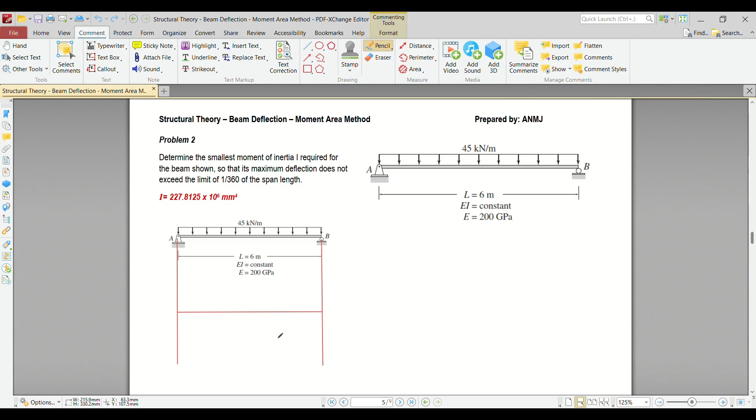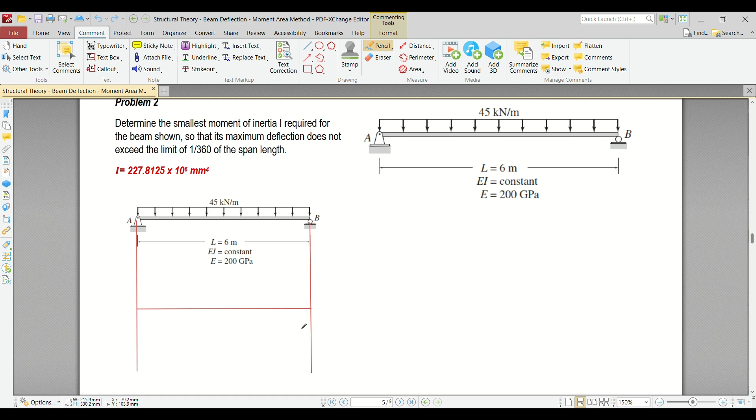Okay, let's try to solve problem number 2. It says to determine the smallest moment of inertia I required for the beam shown so that its maximum deflection does not exceed 1 over 360 of the span length. So what we're looking for here, class, is that our Ymax

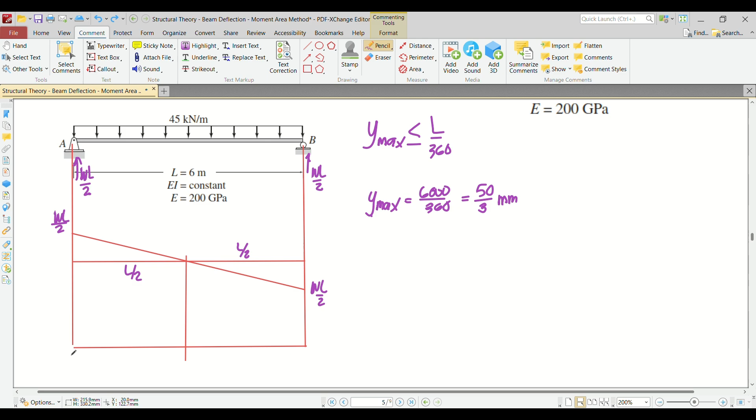So, like this, class. Now, how do we get the value of the height of this moment diagram? It's just the area of this. So how? 1/2, since that's a triangle. Let me put this here. 1/2 times WL over 2 times the length, which is L over 2. So therefore, this is WL squared over 8.

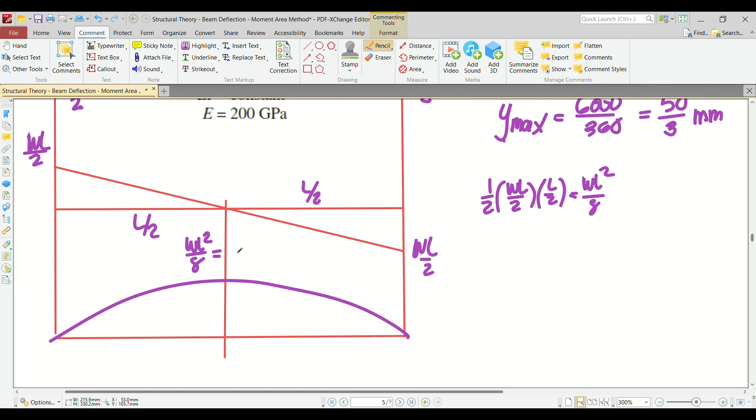Okay? So now the height here, class, is WL squared over 8. Let's plug in the values. What's our W? 45. Our L is 6 squared over 8. So how much is that? 6 squared over 8, so that is 202.5.

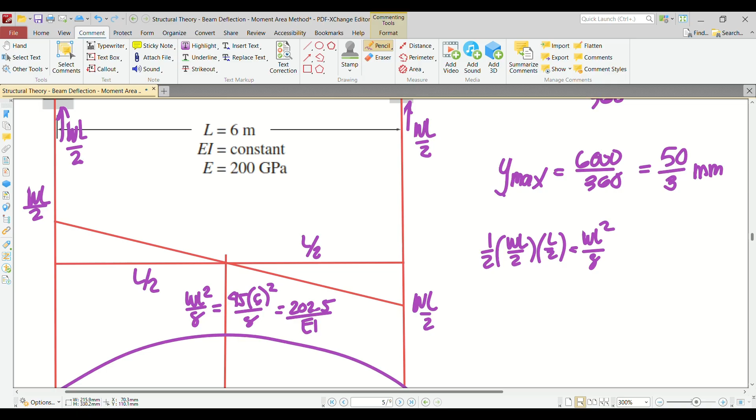Don't forget, we need to divide that by EI. Okay? So now we have the moment diagram. We just need to draw the elastic curve now. Let's draw the elastic curve here.

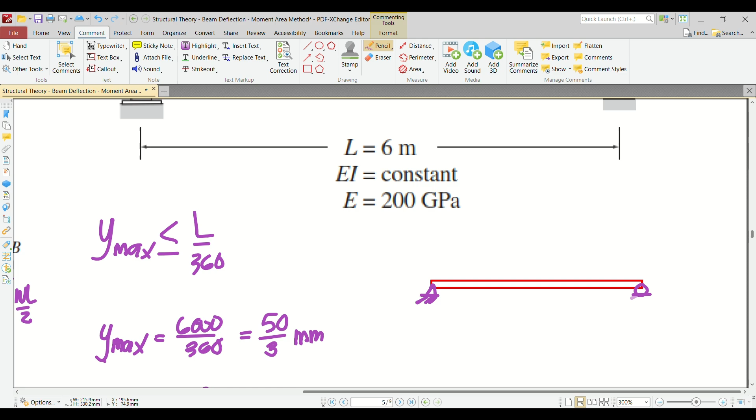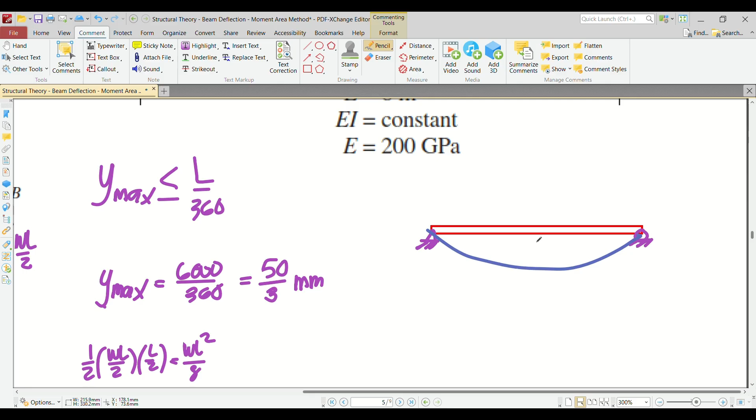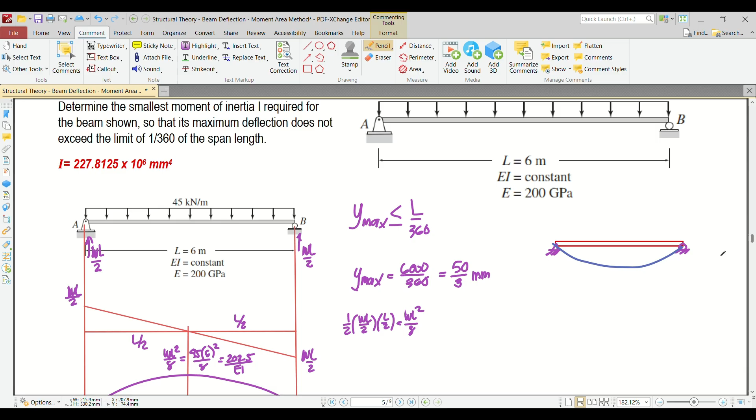So our elastic curve looks like this, right? Actually, if you look at our figure, it's clear where the maximum deflection occurs. Since this is symmetric, the maximum deflection will occur at the center, right? So this is our Ymax. But if you're unsure how to compute the value of x at maximum deflection, you could always refer to the

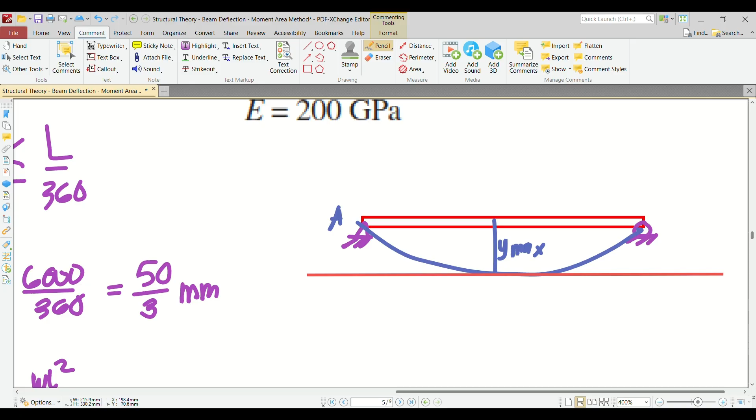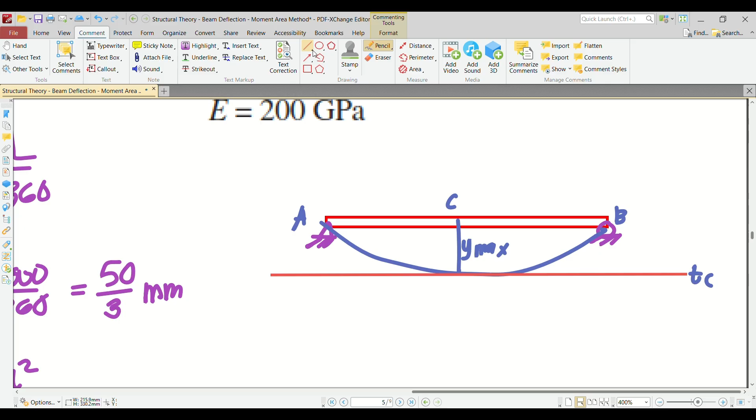Okay, so ibig sabihin, ito ay tangent line sa B. Ang angle dito, class, this is your theta B. Tapos ang angle dito, this is theta, subtended angle between two tangent. This is theta CB or theta BC, pares lang. Pwede mo rin equate yan sa theta B. Makukuha mo yung x value dyan, no?

Using that relationship, ngayon kapag nakuha mo na yan, basically ang value lang yan is 3. Kasi nga symmetric yung beam natin, tapos simply supported, malamang the maximum deflection will occur at the midspan. Naintindihan po? So ibig sabihin, hindi na natin kailangan problemahin yan, halata naman sa figure, no?

O ngayon, anong next step na natin? So ibig sabihin, kapag naglagay ako ng linya dito, plus yung height niyan, di ba that is equivalent also to Ymax? Coincidentally, yan ay equivalent din sa tangential deviation ng B from the tangent line drawn from C. So it means that if we want to get the value of Ymax, we would need to get the value of TBC. So TBC is just the area in between B and C multiplied by x bar B.

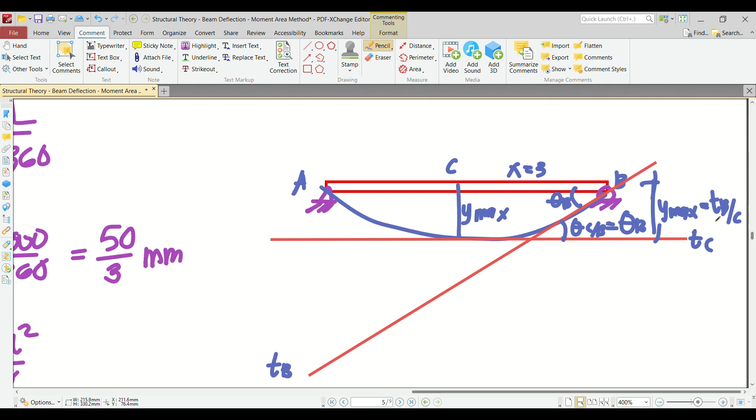So ngayon, kukuhanin lang naman natin yung area nito, makukuha na natin yung Ymax. Pero di ba hindi natin na-derive yung area niyan? If you'll remember, ang na-derive natin na formula is like this.

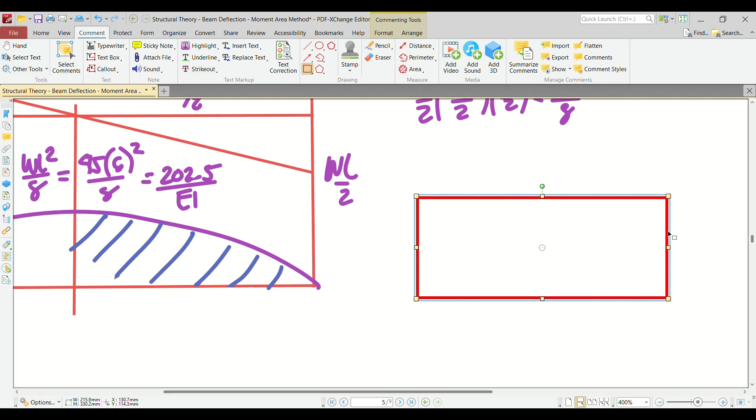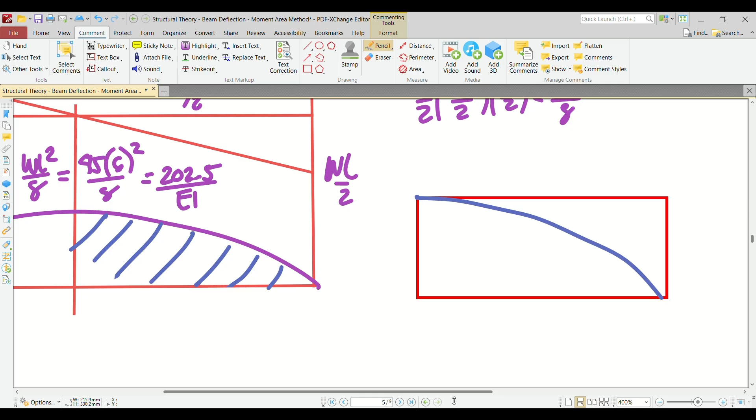Kanina, no, yung generic formula. Kapag naglagay ka ng spandrel dito, yan. Ang nakuha nating formula kanina, o yung pinakita ko kanina, is ito, which is equivalent to 1/3 base times height, considering that this is the base, and then this is the height.

Ang kailangan kasi natin is itong portion na to, class. Paano natin makukuha yung area na yan? O, di ba para siyang rectangle? O, yung rectangle, bawasan mo na ito, edi makukuha mo tong area ng matabang spandrel. So the area of this one is equivalent to area ng rectangle, base times height, minus 1/3 ng base times height. So that is just equivalent to 2/3 base times height.

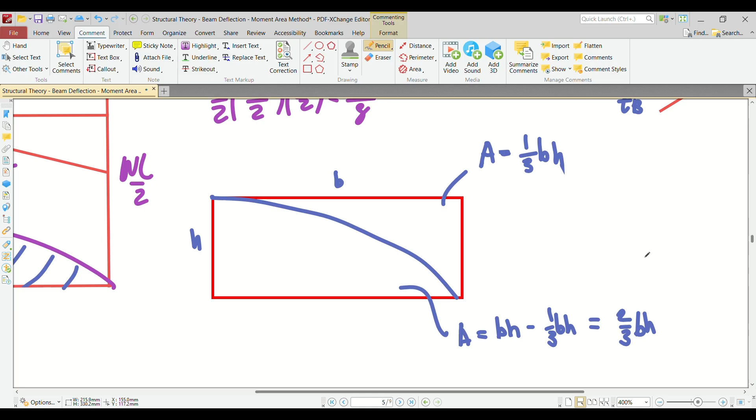So okay na tayo sa area. Pero take note, ang tangential deviation, we would need the distance of the centroid. Ang unang binanggit sa atin is TBC o yung B. So therefore, yung centroid mo is with reference to point B. Kung ito ay point B, no?

Ayan, no? Point B. So ibig sabihin, distance from here to here. So ito yung reference mo, yan yung B mo. So kailangan natin kuhanin tong centroid na to, tawagin natin x bar. Actually, yan yung x bar B mo. How would you get the value of x bar B?

So pwede kang gumamit ng Varignon's theorem, class. Ano bang sabi ni Varignon's? Sabi ni Varignon's, area total multiplied by the centroid is equivalent to the summation of individual area times its centroid, no? So ngayon, kung ilang man yung area na yan.

So gamitin natin yan. Ang gawin natin, area ng spandrel na mataba, itong matabang spandrel, is equivalent, area ng spandrel na mataba times the centroid is equivalent to the area of the rectangle multiplied by the centroid of rectangle minus area nung spandrel na papayat multiplied by the centroid of spandrel na papayat.

Kasi hindi naman natin kailangan to, kailangan lang natin itong portion na to. No? So paano natin gagawin yan? Area total is 2/3 base times height and then x bar.

Again, yung unang area is rectangle, so base times height. Ang centroid niya is B over 2. And then minus, kasi siyempre rectangle, minus ito, makukuha mo to, no? So minus 1/3 base times height times centroid.

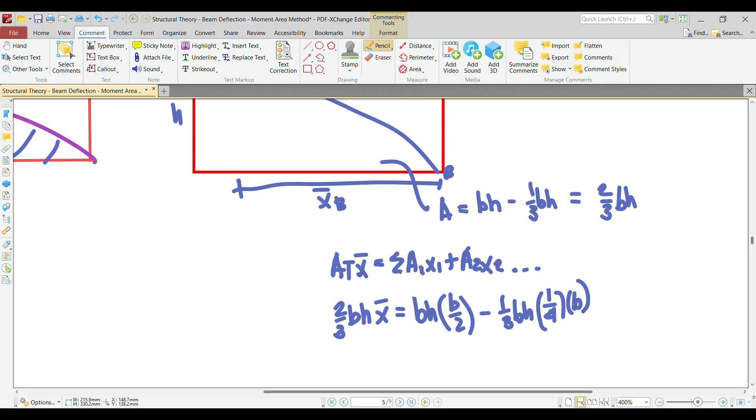If you'll remember, ang generic formula is 1/n plus 2. So since second degree ka, yung centroid mo is 1/4 ng base. Nangyayari? So cancel natin, similar terms. So this will be x bar is equivalent to b over 2, and then minus b over 12.

Divided by 2/3. So therefore, your x bar here is, okay, 1/2 minus 1 over 12. So ito divided by 2 over 3, so parang 5 over 8 times b. No? So meron na tayong area, meron na tayong centroid.

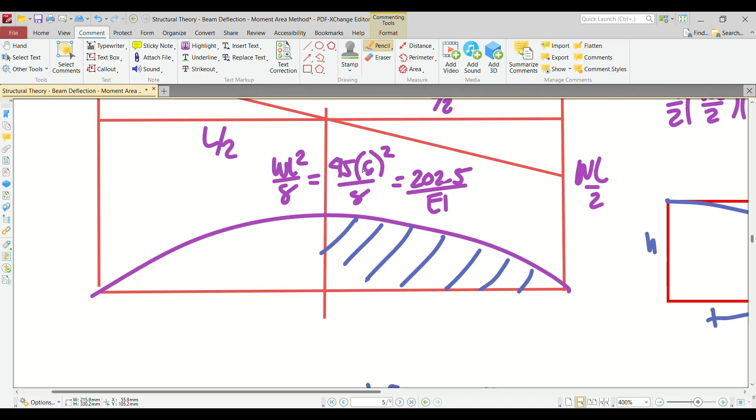We can now calculate the value of TBC. So dito na lang, no? So TBC is equivalent to Y max is equivalent to 1 over EI times 2 over 3 times the height, which is 202.5. The base is x, which is 3. And then, the centroid is, ano kaya? 5 over 8 times b. So 5 over 8 times b, which is 3. Okay? So yung y max natin, class, is equivalent to 2 over 3, 202.5 times 3 times 5.

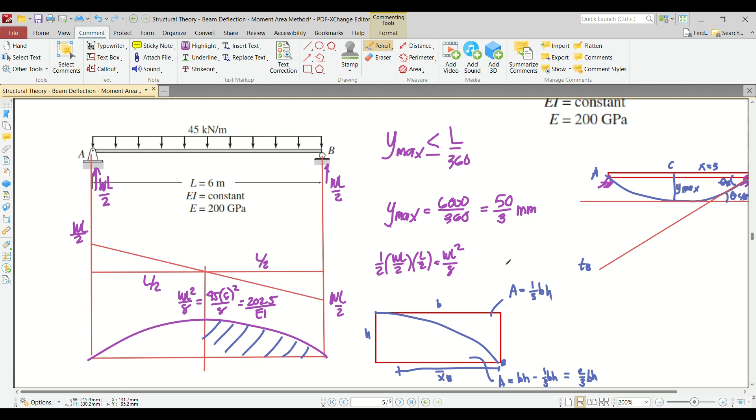759.375 over EI. Okay, so now if you want to get the value of I, equate this 50 over 3 to the Y max. So, 50 over 3 is equivalent to 759.375 over EI. So what's our E? 200,000. And then I is what we're solving for.

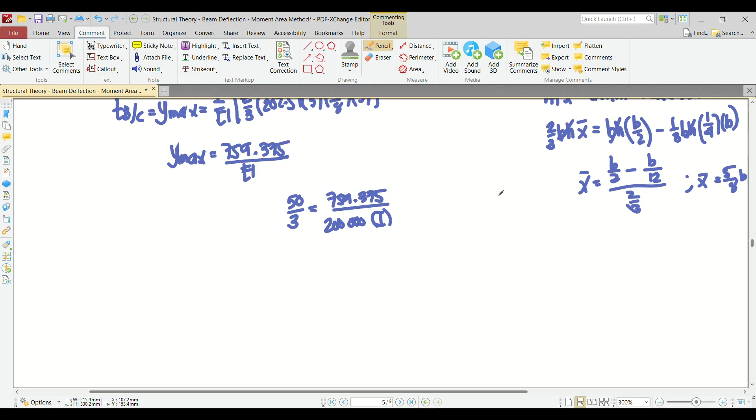Now, what's the unit of the numerator? Easy, class. Look at this, this is coming from the moment diagram, so the unit is kilonewton meter. Multiply by length, meter. Multiply by centroid, meter also. So the unit, class, is kilonewton meter cubed.

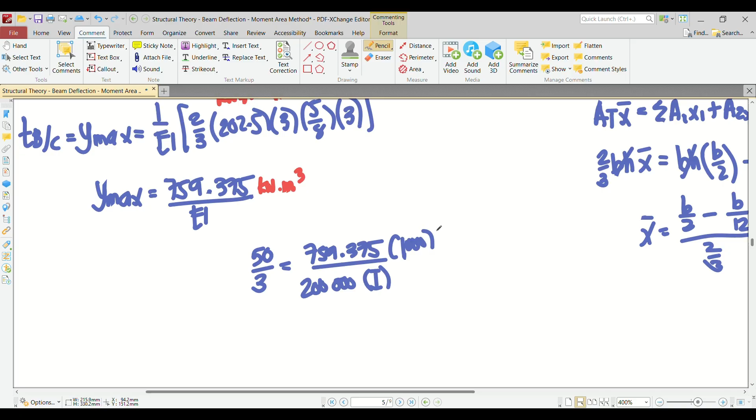So for it to be consistent in unit, you need to multiply this by 1,000 raised to 4. So therefore, your I will be in millimeter raised to 4. So what's that value? The value is 227.8125 in millimeter raised to 4.

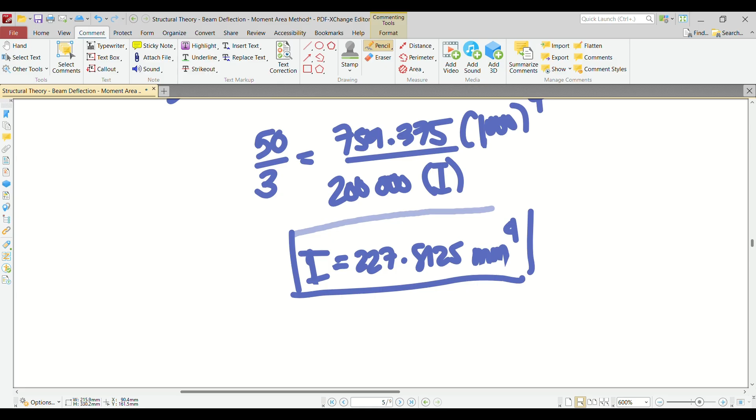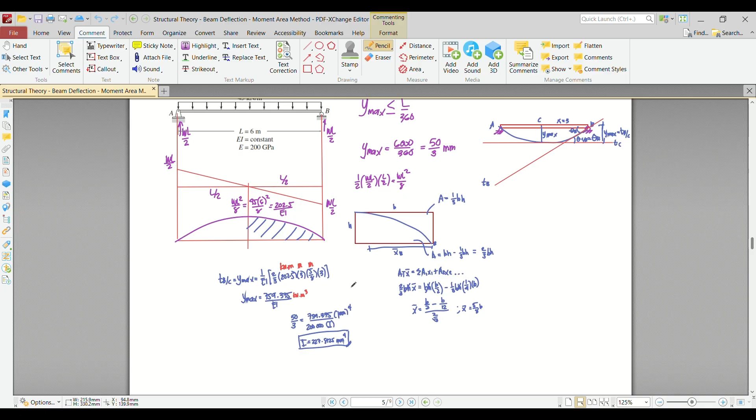So what am I saying here? I'm saying, class, if you're having a hard time using moment diagram by parts, you could always rely on doing the traditional shear and moment diagram. The same answer will come out. It's up to you which method is easier for you. But for me, moment diagram by parts is easier so you don't have to go through the shear diagram. So that's how we answer problem number 2.

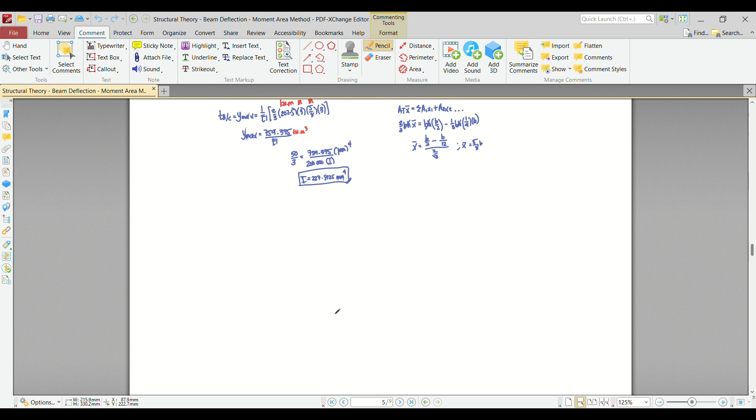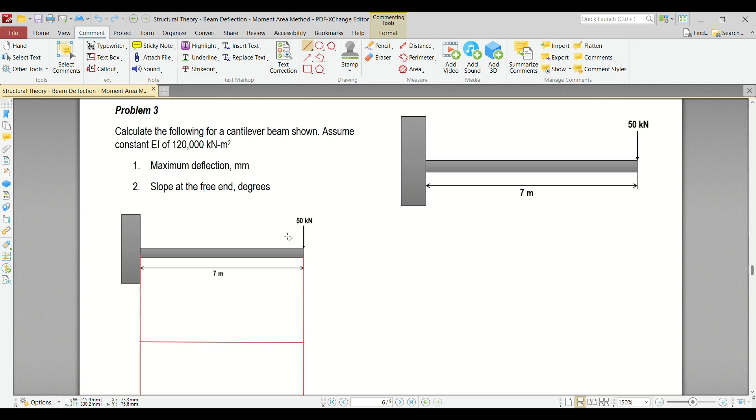So now, if I choose a reference point here, class, if I reference it at the free end, I cancel the 50, and I would be having the reaction, the vertical reaction at the fixed end, as well as the moment reaction. So that's two. But if I reference point at the fixed end, class, I can cancel the moment as well as the vertical reaction, therefore making my force just one, which is equivalent to 50 kilonewton, which is still a concentrated loading.

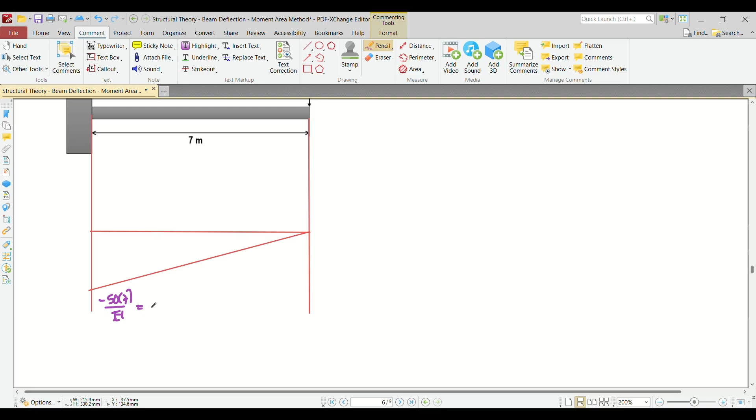So that means, if I draw that, class, it's just triangular, first degree. So what's the value of that? Now, to get the value of that, that is just equivalent to negative, because it's going down. So this is negative 50 times 7 over EI. So therefore, this is negative 350 over EI.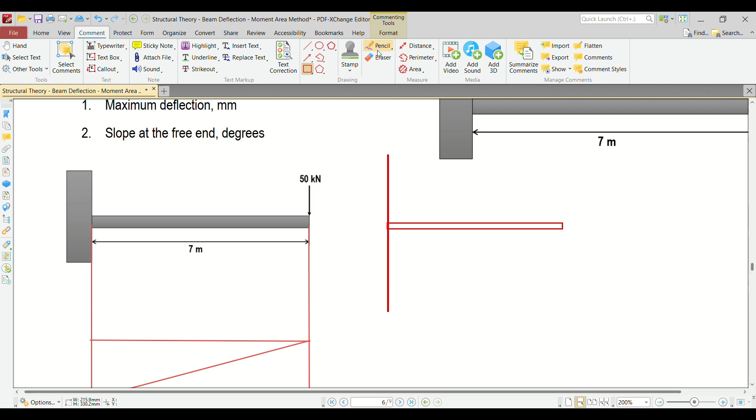Since this is a fixed support, that means there's no slope there. That means there's a straight portion there, going down like this. Something like this, class. That's what our elastic curve looks like.

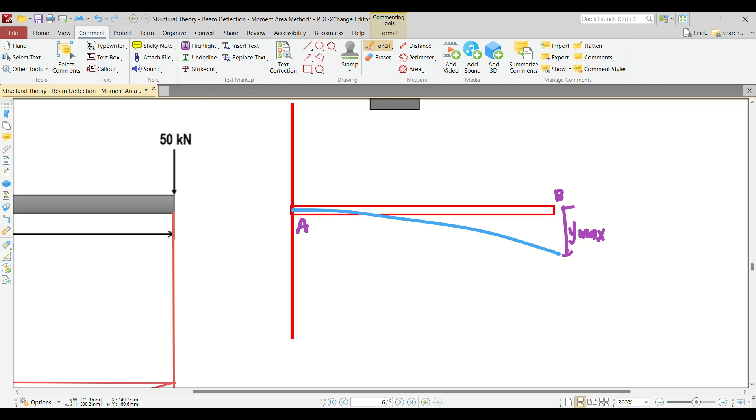Then, now, since that's my tangent line at point A, that means this is also called the tangential deviation of B from the tangent line drawn from A. Right? Because this is your tangent line at A, this is the representation of the deflected shape of point B, so that means T_BA, tangential deviation of B from the tangent line drawn from A.

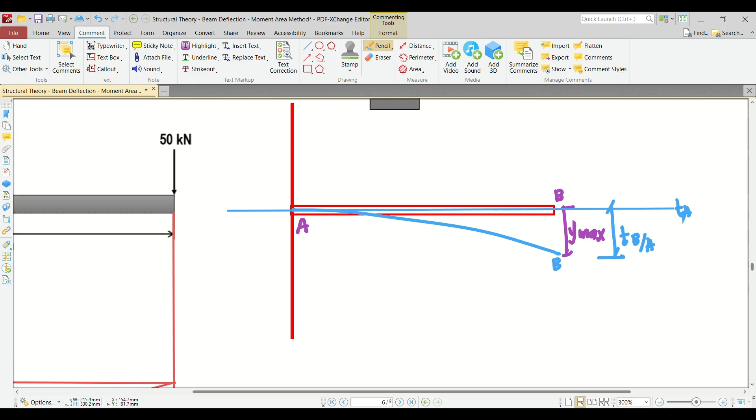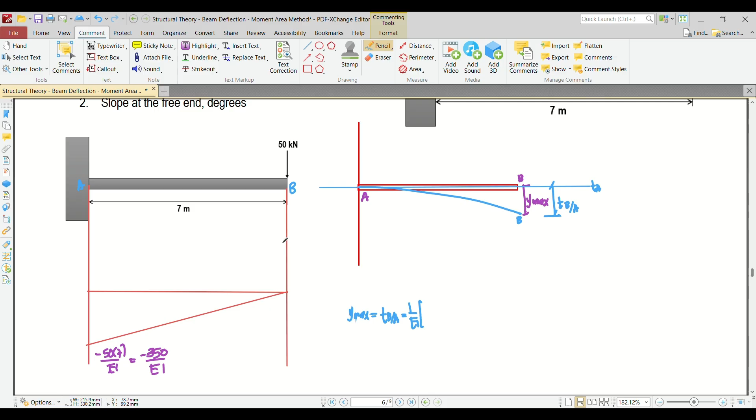That means, if you want to get the value of Y max, you just compute this. Let's try computing that. So what happens? Y max is equivalent to T_BA, which is equivalent to 1 over EI multiplied by, what's this? Isn't this just a triangle, the area between point A and point B? So this is point A, this is point B. So therefore, triangle, 1/2, negative.

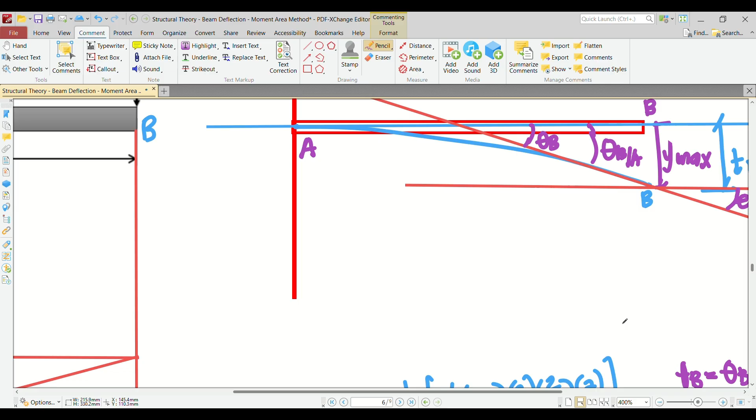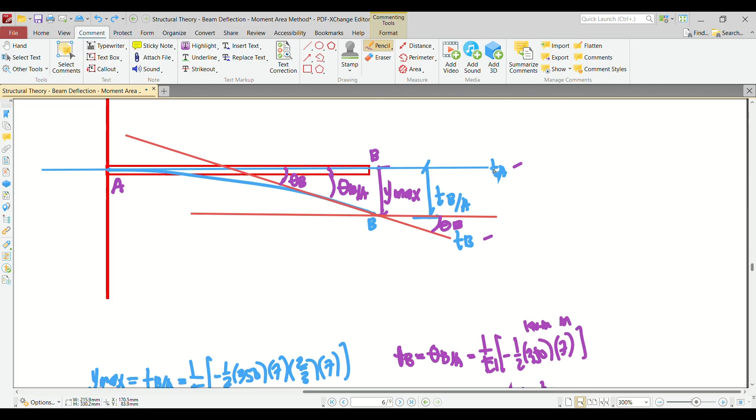Sorry. Hindi ba ito yung tangent line sa A? Ito yung elastic curve ngayon. Tamang-tama, negative talaga yung inaasahan mong sagot, kasi yung tangent line sa A, nasa baba niya si elastic curve.

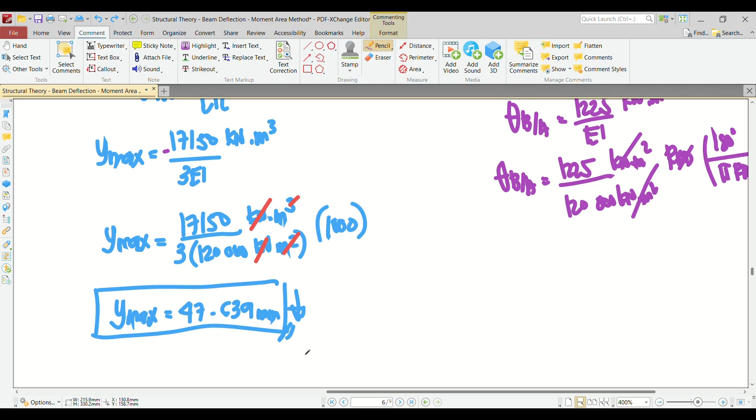So, you will expect a negative value here. But since we don't have any sign convention considering moment area method, ninegate ko na yung sign convention, kaya nirekta ko na sa pag-compute ng Ymax. Basta lagyan nyo na lang ng direction. Okay? So, that's how we solve problem number 3.

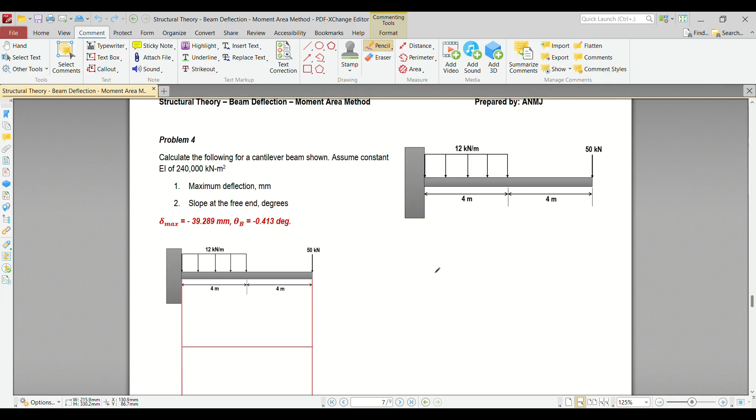So, let's now try to solve problem number 4. Paano na natin masasolve yung problem number 4? Actually, same lang, gawa ko ulit moment diagram by parts. Dito ko ulit mag-reference point para ma-eliminate mo na naman yung vertical reaction as well as the moment reaction. I-drawing ko lang.

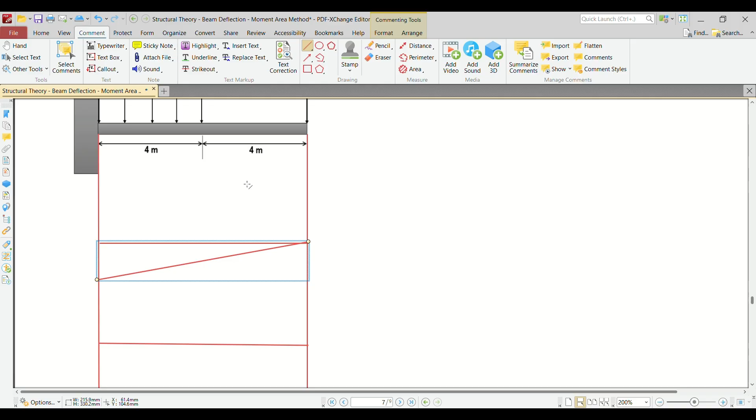Ang kinaibahan lang nito, meron na siyang uniform load. Okay, this is for the concentrated load 50. Therefore, ang value neto class is negative 50 times 8, 8 na tayo class ha, kasi 4 plus 4. By the way, ganun pa din yung hinahanap. Binago lang yung EI, 240,000 kN meter squared.

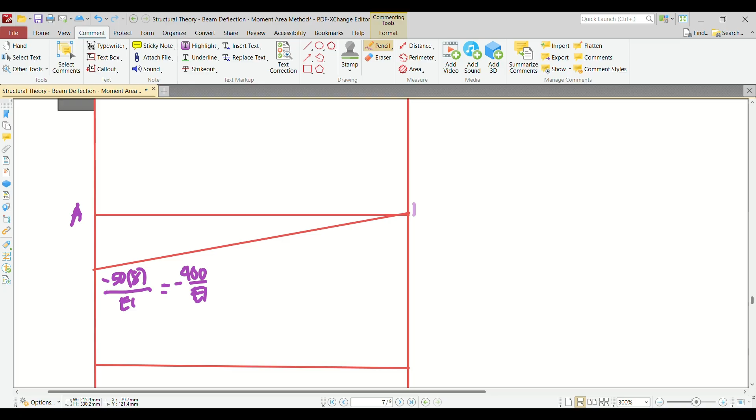Okay, 50 times 8 divided by EI. So, kaya ito, 400. So, this is negative 400 over EI. By the way, this is point A, point B. And then for the other one, puro lagyan natin linya.

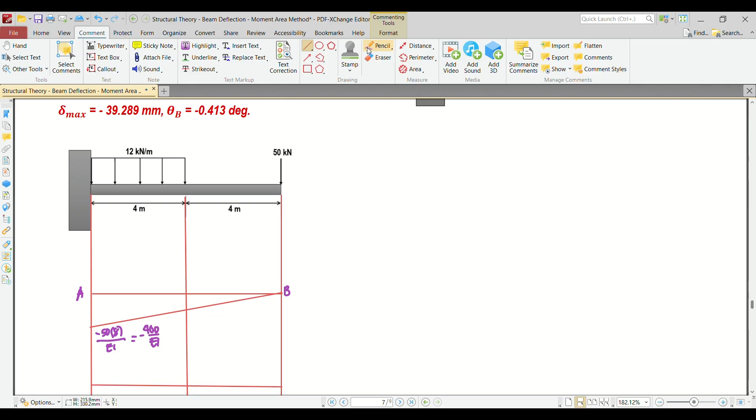For the other one, uniformly distributed load. So, pababa, pababa din sa reference point ko. Kaya na kaya itsura niyan, parang pa ganito. Anong value niyan? Ang value niyan is parang nag-moment ka lang dun sa point A.

Therefore, 12 times 4 times 2. Negative nga lang, negative 12 times 4 times 2 divided by EI. What's the value of this? Negative 96 over EI. So, ngayon, paano natin susolvein yan?

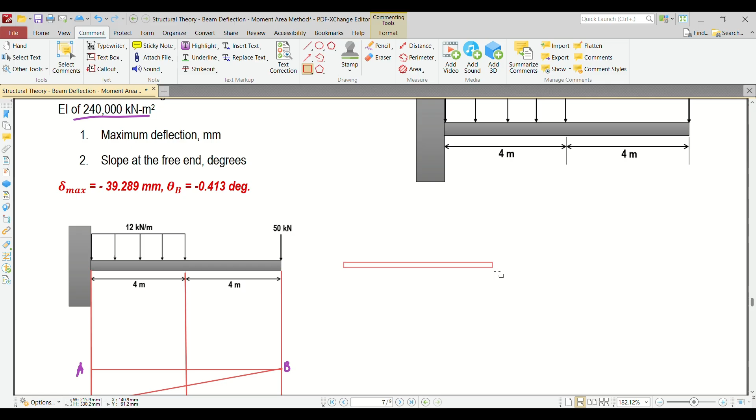Actually, again, like I said earlier, all of the appearance of the elastic curve of cantilever beam is just the same, no? Paano yan? Pag naglagay ka ng elastic curve dito, maganda. Okay, so this is your Y max.

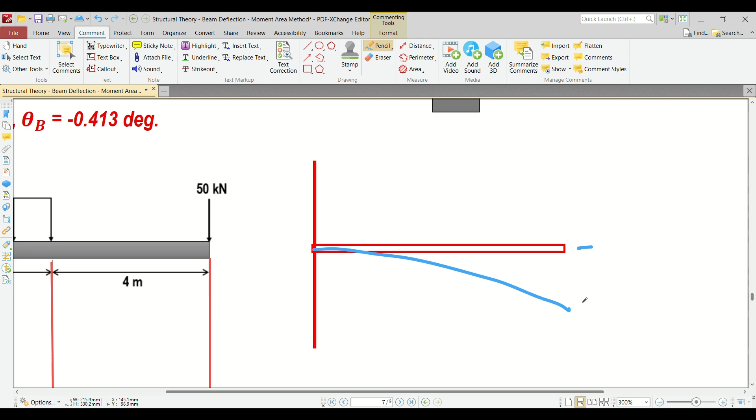Point A, point B, tapos tangent line. Tangent line sa point A. Tangent line sa point B. So, ito class is the representation of B pag nag-deflect na. So, therefore, ito ay T A, BA. So, tangential deviation of point B from the tangent line drawn from A.

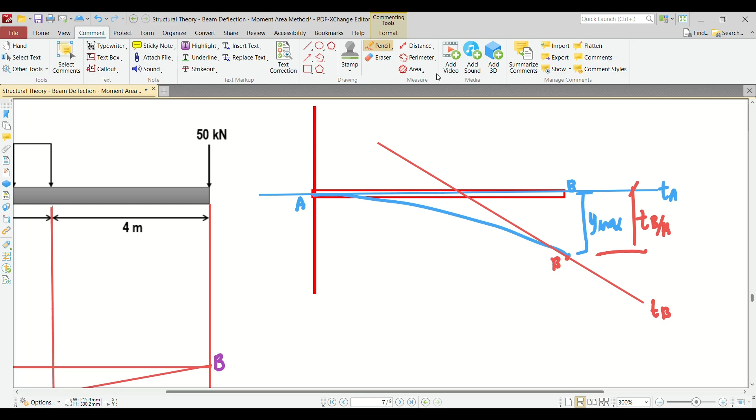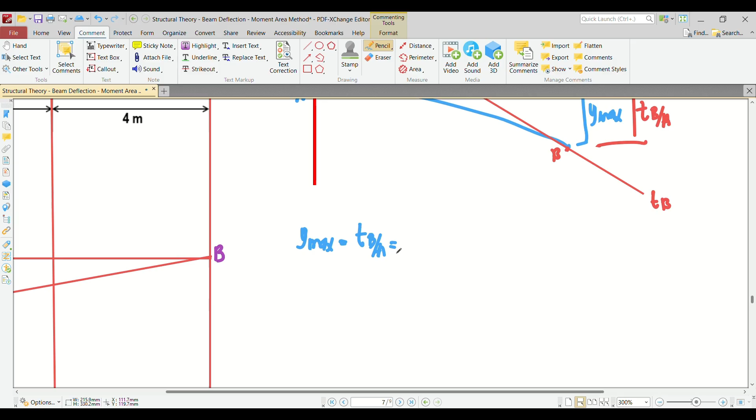So, computin na natin yan, class. Paano kaya yon? So, Y max is equivalent to TBA is equivalent to 1 over EI times area in between B and A. So, unahin na natin tong triangle. Negative 1/2 times 400 times 8. Centroid, unang binanggit si B, so therefore, that's 2/3 ng 8.

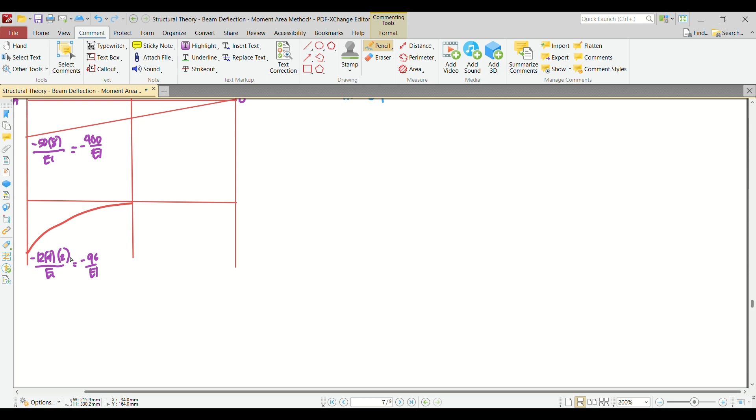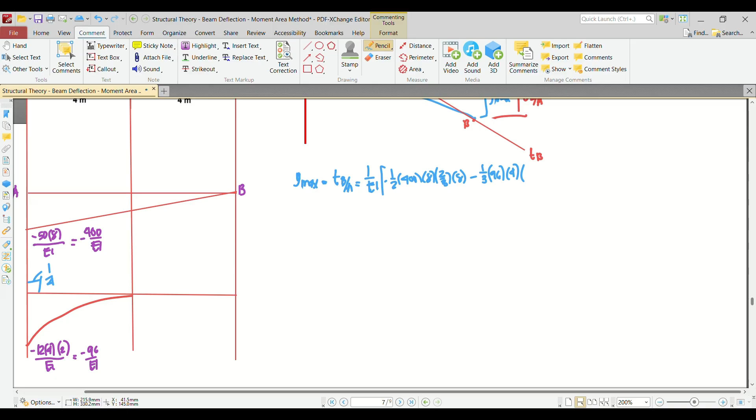And then, minus spandrel. Ang serye ng spandrel na ganyan is 1 n plus 1. Tama ba? So, therefore, this is 1 over 3 times the height, which is 96, and then the length is 4. Centroid class is unang binanggit si B. Ang centroid dito, ito class, pag kinompute mo, yan yung 1/4. Pero kasi kailangan natin to, so that's 3/4 ng 4 plus 4.

Okay, so what's the value of Y max? A over 4. 28238 over 3 EI. So again, ninegate ko na yung negative sign and the unit for this one is kilonewton meter cube. So again, binigyan naman tayo ng EI 240,000 kilonewton meter squared. So i-plug in na lang natin. So therefore, Y max is equivalent to 28238 times 1,000.

Divide ko to class ng T, 240,000. Yung 1,000 class is kagaya lang ng ginawa natin from previous problem. Tingnan nyo na lang. This is 39.219 millimeter, that is directed downward. Okay, natin?

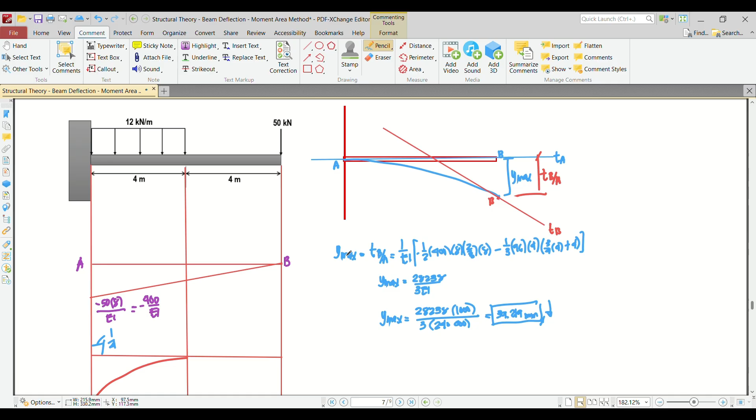So, same naman, no? Nagkamali lang siguro. But 219. Okay, so baka nagkamali lang ng type. Okay, so that is our answer for the maximum deflection. How about the slope in degrees.

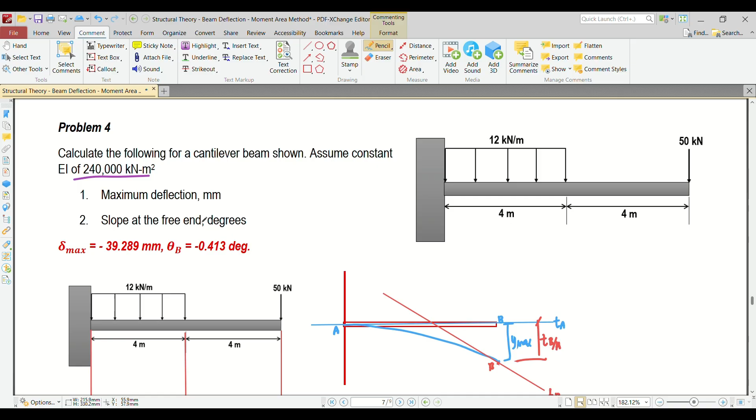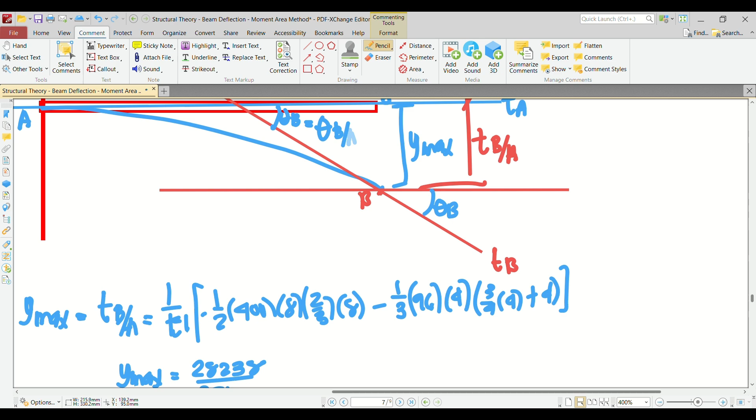So ganun lang din, gawa ka ng horizontal line dito, class. So ito yung iyong theta B. Ito rin, theta B. So ito, theta BA, tangent angle between two tangent, na. Okay, so theta BA is equivalent to 1 over EI negative 1/2 times 400

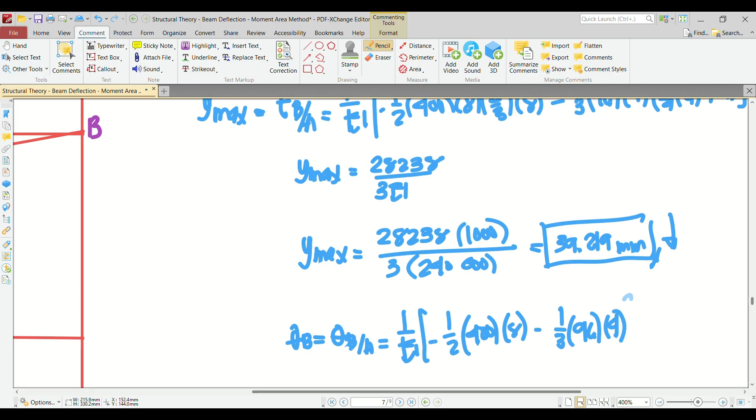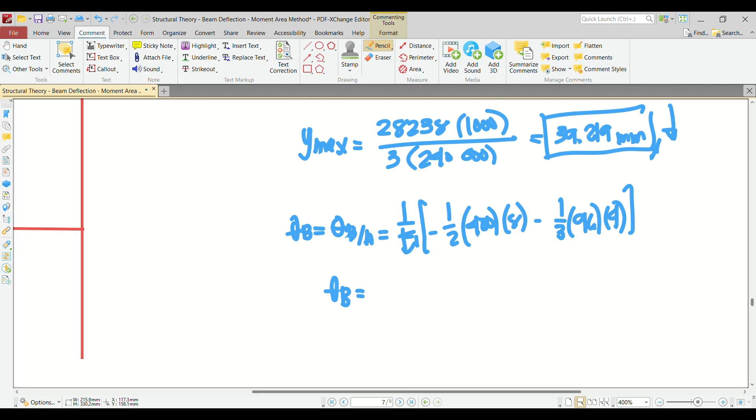times 8 minus 1/3, 96 times 4. So yan na yan. Okay, what's the value of theta B? 1728 over EI. Lagyan natin si EI, class, and then convert natin into degrees.

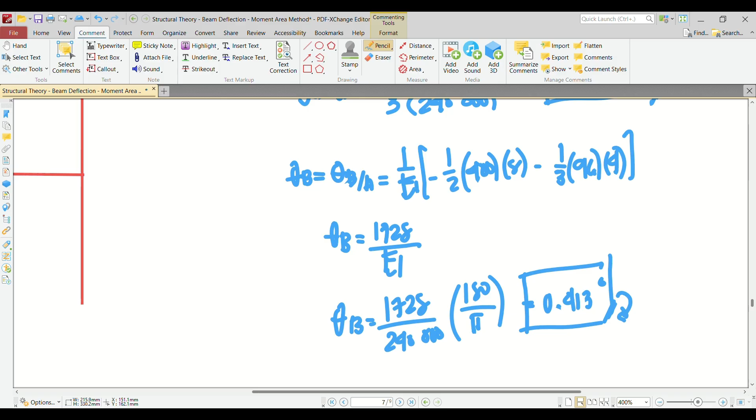180 over pi. So 0.413 degrees, that is in clockwise direction. So therefore, that is our answer. So let's see, so tama naman, no? So that is how we solve problem number 4. Ang pinagkaiba lang nito, class, is nagkaroon tayo ng uniform loading. Okay? So let's try to solve problem number 5.